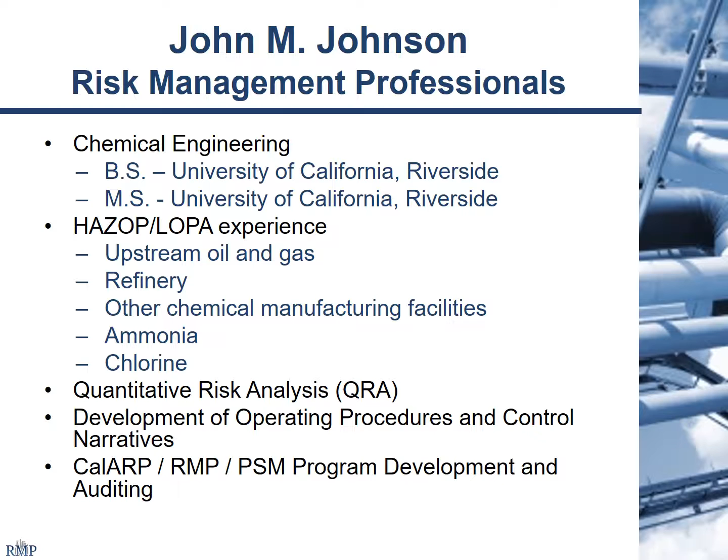I also jump into quantitative risk analysis, QRA, as Chennai mentioned. That's just a deeper dive into these quantitative analysis, as well as development of operating procedures and control narratives. I actually like being in the field. I get a little bored in my office, so any excuse to actually get me out with real equipment kind of makes me happy, and it gets me away from everyone else in my office.

All right, so the key topics. I tend to talk fast, so give me 1 second while I take a deep breath and pace myself. So this presentation is basically going to be an overview of LOPA. I'm not going to dive too deep into it, but as I'm presenting these definitions for people who are a little unfamiliar with it, I'm going to introduce certain topics, and as we go, I'm going to build a very high-level LOPA scenario. So hopefully as we do this, everyone has a greater understanding of what occurs in these studies.

Also, why do I care? The second part of the title here. Well, basically for a lot of facilities, there's changes to the regulatory framework. It's being implemented in places that it wasn't necessarily demanded before. Fortunately, there have been a lot of facilities, a lot of upstream oil and gas that I work with, a lot of other facilities who've already been introducing this over the years. Once again, this is going to roll out.

And the other reason why I care, and I will present that as we go, it really is, for me, it is complex, but it's an easy fit into a HAZOP scenario. You can introduce this into frameworks already existing and use this to override what I call dominant personalities that will often show up in a HAZOP.

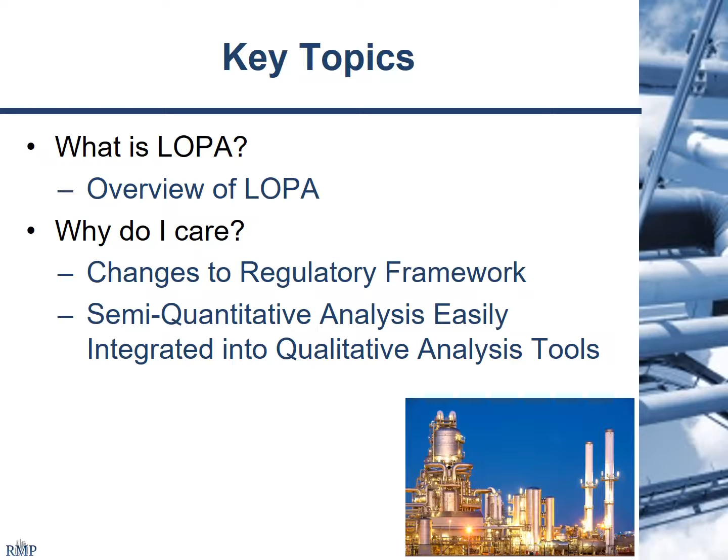All right, jumping into what is the layer of protection analysis. So this has been touched on before. It's a semi-quantitative risk assessment. Basically, just like a HAZOP, we're trying to evaluate the safety integrity of our process operations. We say semi-quantitative, quantitative. It's an order of magnitude approximation. As Chennai mentioned, the math is a little bit easier. It's something you can do in a room with a team and generate fairly quickly.

Software does it, PHA Pro does it for you. A lot of times I'll have a spreadsheet ready, but honestly with a calculator and pen and paper, we can usually do this if necessary. Typically, I've seen these used in all sorts of places. I generally get to do these right after a qualitative study, so like a HAZOP. Generally, the corporate policy is going to dictate when you would pull off these LOPAs.

So, for instance, I've been to facilities where they like to do it scenario by scenario. So you do a scenario, you develop a high severity consequence, and you can immediately do a LOPA on the HAZOP scenario developed there. Some places like to do the entire HAZOP first, then you go through, figure out what needs to go into LOPA, and then you do the LOPA. And still other facilities will say, we're going to actually disband this team, generate a whole new team, and we're going to LOPA after the fact.

Similar to a HAZOP, it relies on a multidisciplinary team. Chennai made a very good point. You are relying on math at this point, and if you've already done a HAZOP, you've already established your severities. So you actually could feasibly cut down your team membership slightly as long as you have that membership representation from the facility.

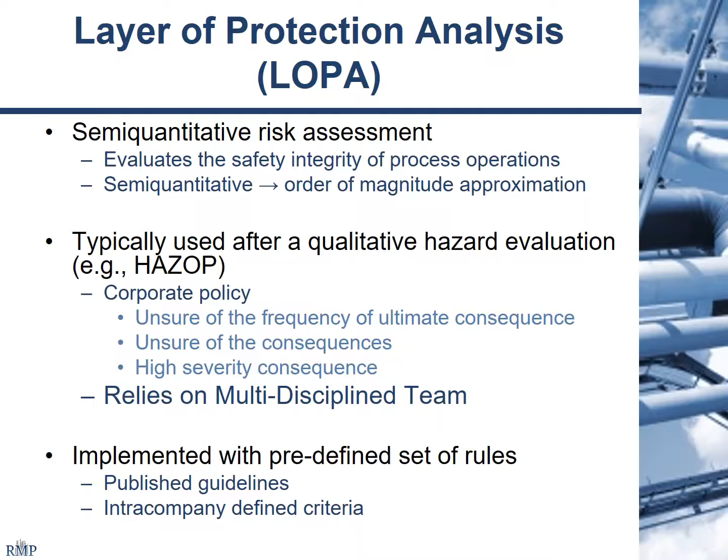So, kind of the governing idea behind this is the risk acceptance criteria from a facility. So basically, this is what they will tolerate. Typically, it's a tableized value.

For instance, here, if you look at those impact event consequences with names like catastrophic, severe, moderate, if you're in a HAZOP, maybe catastrophic is multiple fatalities. Maybe it's a single fatality. Once again, it's going to be company specific. Maybe severe is a single fatality. The important point here is what the company demands. We cannot have a catastrophic event happen more than once in 10,000 years.

So, as I said, I'm going to generate a very high-level scenario here. So, I'm assuming we had a HAZOP. The HAZOP team ranked the consequence as severe. Since the corporate policy is to perform a LOPA on any severity consequence greater than or equal to 2, we're going to start a LOPA here with a risk acceptance criteria of 1 times 10 to the negative 3, which basically means no more than once in 1,000 years.

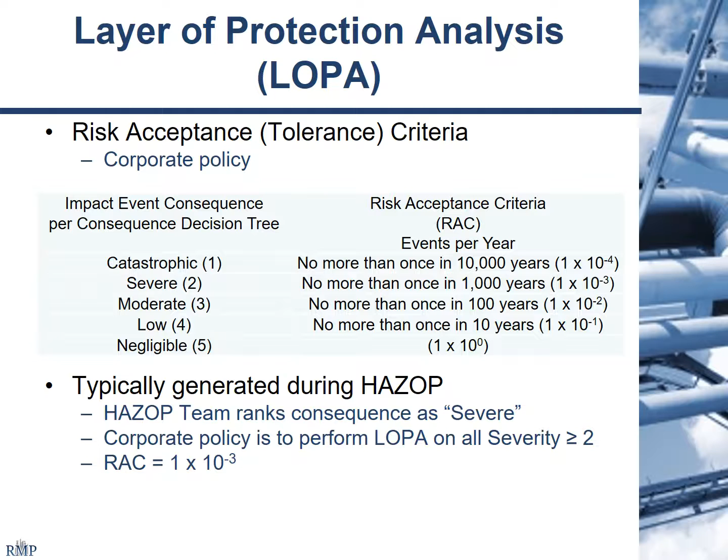The initiating event frequency. The difference between a HAZOP and LOPA: in a HAZOP, we look at that ultimate potential consequence. Something overpressures, someone gets hurt, there's personnel exposure and injury. It's kind of how we always end those statements. The LOPA looks a little bit more at initiating cause likelihood. The likelihood that someone misaligns a valve, the likelihood that your basic process control system fails. Whatever those events are that are going to ultimately precipitate that ultimate potential consequence.

Typically, the company is going to generate these based off a literature review. I stole this from the CCPS guidelines for layer of protection analysis. Unloading and loading hose failure. So if you read the literature, it says 1 to 10 to the negative 2 times per year. So the company looks at that and they said, all right, we're going to look at this once per 10 years. That's the initiating cause likelihood that, since we're following their rules and we're doing the LOPA, we are going to plug in as our initiating event frequency.

This is an example of a table, once again, from CCPS guidelines for initiating events. Typical ones I see all the time, human error for non-routine task. Frequency is about 1 in 10 years. Same thing as a BPCS control loop failure, expected to happen about once every 10 years.

Oh, really? So I mean, it happens. And that's the whole point of...

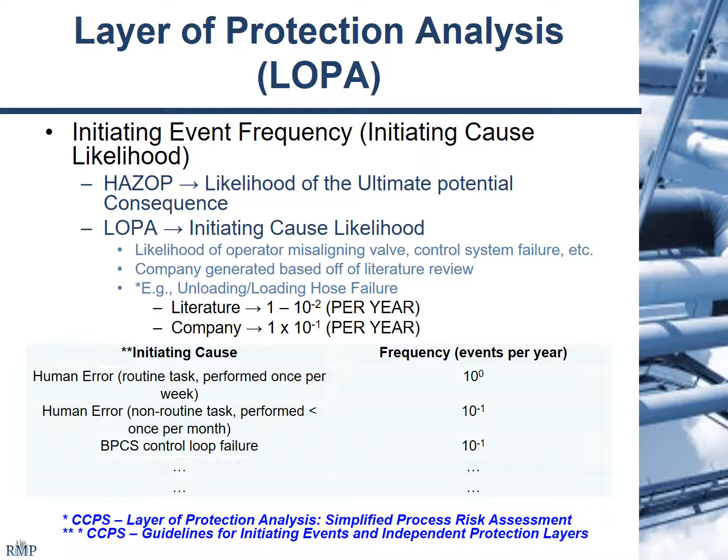I just have an assumption concerning an operation that's done so many times by one person, or how many people? Is there a population variable there? There is not, and that kind of is the difference between this analysis and a qualitative one. So we do a HAZOP, and we're going to consider those things. We're going to say, well, tell me about your field. Tell me, have you ever seen it? How many people do you have touching it out there?

This is a little less forgiving, which is why a lot of people don't like to do the LOPA. LOPA is not hard to implement, but it's less forgiving, and we haven't even got to where I start talking about the documentation, the things you need to do to prove why you make these decisions. Like Steve said, it's erring on the side of safety. Right. Well, you already told Mike.

I think sometimes some companies use more conditional modifiers to give them the extra thing that they couldn't have. That's the soft side of things, right? When they say no one's there, and so I'm going to give myself another factor. All right. We'll talk about that too. Well, and that's the whole point. I think what we're trying to do with LOPA is get rid of some of the qualitative aspects of it. There's pluses and minuses both. I actually am a fan of LOPA, but it's got to be used properly.

All right, as I said earlier, the math portion. So the LOPA ratio is basically you want to prove that with whatever safeguards we have in play, whatever the initiating cause likelihood, using those all as multipliers for probability, we will defeat the risk acceptance criteria of the company. So basically, if you divide the two numbers together, you should get a 1 or a number greater than 1. That just proves that your incident should happen less than what the company has stated it can feasibly happen.

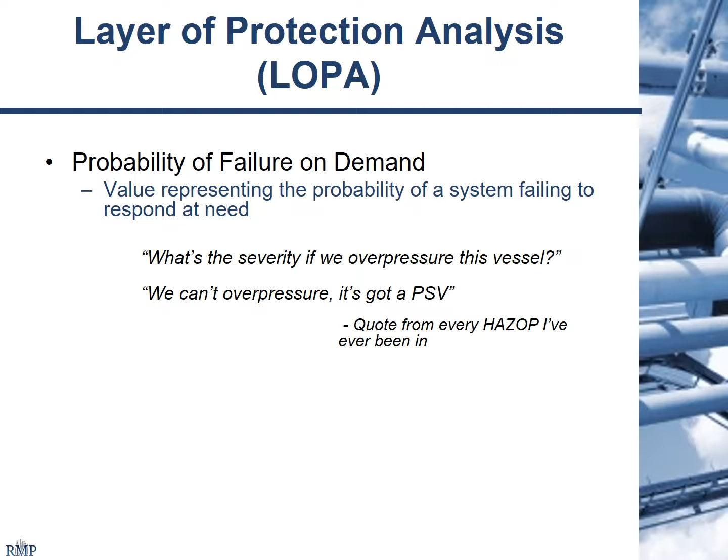Once again, I'm going to go ahead and double up on Chonai's presentation. I underlined independent because it's an independent protection layer. It needs to be independent of the initiating event. If you have a control system that failed and it opened a valve, but you have a switch that's on that same control loop, that switch isn't going to help you because the control system thinks everything's great. That's why it opened the valve.

So the first thing you're going to ask, and you're going to look in that P&ID, you're going to go, hey, and they're going to say that we've got a pressure switch high on it. It's going to shut everything down. Well, it's on that same control loop. It's happy. It's not going to do anything.

So it should also be independent of other IPLs. These are other safeguards. Once again, it's that layer of independency. So your first level could be that basic process control system. If it fails, you have an alarm. Can the operator react? Maybe they can do that. Maybe the operator fails to do that. Well, then you've got a pressure relief or some other system in play. Each one is that independent protection layer that's going to stop this ultimate consequence, this overpressure event, from actually happening.

What I like about LOPA, there's rules. This is a very simple overview. Generally, if I'm doing a LOPA, I'll actually have access to the books, and we can just pop out an entire sheet. And if they go, okay, well, we've got an alarm, I have certain questions I'm going to ask. Can an operator be expected to respond in time? Are switches maintained, calibrated, and inspected at regular intervals? A pressure relief, is it sized for the appropriate case?

Like I said, these are baseline questions. There's more that actually get involved in an actual study. These independent protection layers, they can be passive, active. Once again, there's rules governing what we can use.

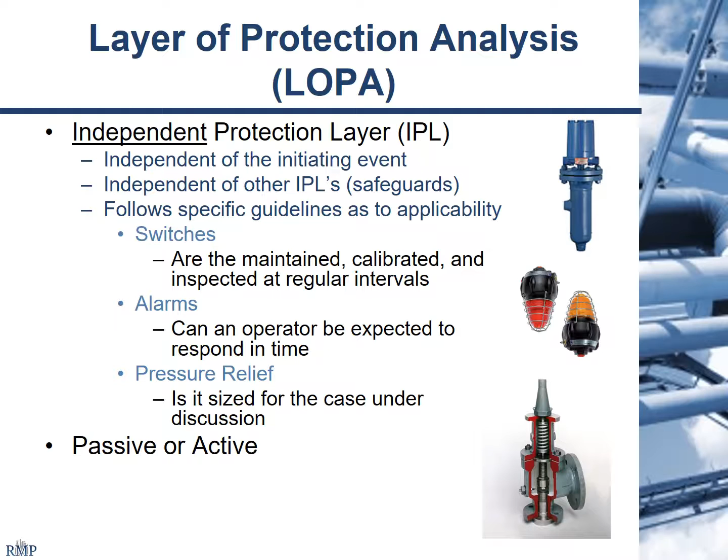As a sidebar, it's not going to enter in the equation I'm doing now, but enabling conditions. These LOPA event frequencies are on a per year basis. So everything's based on once per 1 year, once per 10 years. However, if you have some sort of seasonal risk, so if you're an ammonia facility, you're an ag plant, and you only worry about ammonia refrigeration during the summer, you want to take that into consideration, because we're going, well, it's once per year, and you're like, well, I use it 25% of the year. That simply factors into the equation, and it gives a more honest picture, and that's what LOPA is supposed to do, provide a more honest picture of what's happening in the field.

The important point between enabling condition and a conditional modifier: the enabling condition modifies against that initiating event ever occurring. Once again, seasonal risks, process state risks. If the process is not always using that hazardous chemical, well, you're not really going to calculate what's going on in those off times. Conditional modifiers, as we have brought up, the favorite one to ever bring up is personnel presence some percentage of the time. This is, to my mind, an overutilized modifier. It's a true modifier. You just have to calculate it honestly.

So if I'm in a PHA and they go, oh, well, we have one operator who goes out there once a day and he checks for 5 minutes. I'm like, cool, that's less than some percentage of the time. But of course, they also have maintenance personnel. They've got housekeeping personnel. And oh, the unit's on the way to the lunch area. So they've got traffic all day. So those are the questions you ask during a LOPA. It's all about proving and making sure that you can support those numbers if anyone ever asks you, why did you develop this particular percentage?

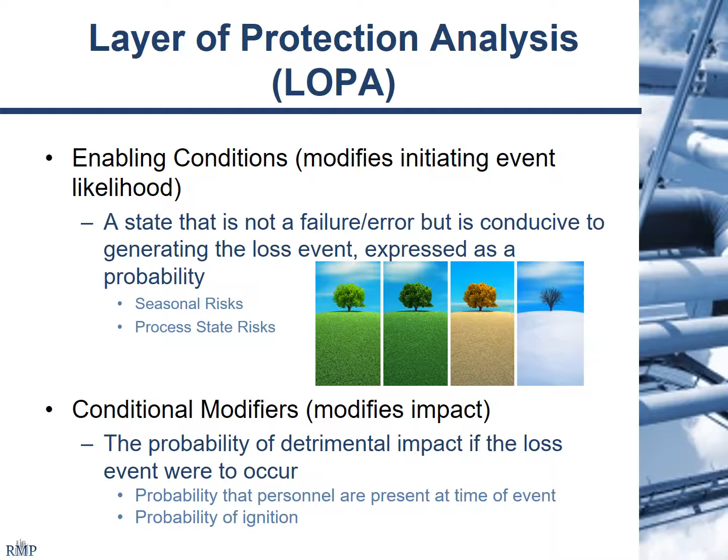Okay, so once again, here's where I go back to what I was hitting before. Layer of protection analysis, the values are documented and defensible. So these are just examples that I've seen and that I ask for if someone tells me, we're going to use this sort of probability, we're going to use this event condition. For dispersion modeling, that usually goes to probability of developing a hazardous atmosphere. I've had those come up.

Typically, if you're doing a design stage HAZOP, maybe during the FEED stage, the question was raised, so someone did the dispersion modeling, they bring it in, you go, oh, okay, we're not actually going to develop that hazardous atmosphere, but we've got a paper trail that says it. Someone did the work to study it. Maintenance records, that goes to demonstrating the reliability of your IPLs. It shows that they're being maintained, it shows that they're being inspected, and they're being calibrated. Once again, all those rules that LOPA requires you to do.

Policies and procedures, once again, this goes back to the personnel presence. If you've got signs up and you've got a policy and procedure that says, they've got a lunch area on this other side of this, but they're required by our policies and procedures to walk all the way around the plant. They've got something that says this is only authorized personnel. They just have to demonstrate this is why we're saying that no one's going to be out there except for some percentage of the day.

Electrical classification, I threw this in as an example. Once again, it goes to probability of ignition. Probability of ignition is a little harder to calculate. Typically, it takes time, so you really won't see it pop up in the study unless someone's done the work and can prove it in the study.

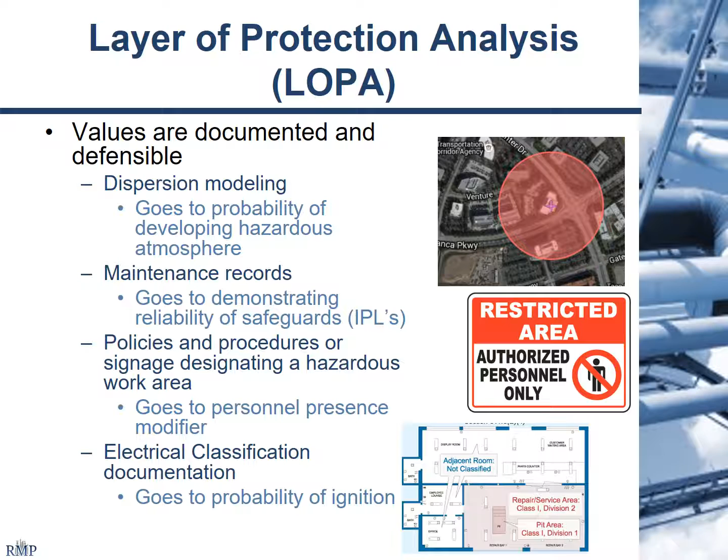Back to our example. I brought up the probability of failure on demand. These, once again, representative table, a very easy one. This is a probability of failure on demand based on industry best practices. Basic process control system will generally fail about once every 10 years. A human being will fail to respond about once every 10 years. Spring-operated valves are considered a little more robust because they're mechanical.

Probability of ignition. Are you assuming that there's an electrical source? It's simply one factor. So, once again, that's why it has to be developed, because different chemicals are going to have different reactions to hitting oxygen. And we also, right. Trucks, cell phones, all that stuff comes into play.

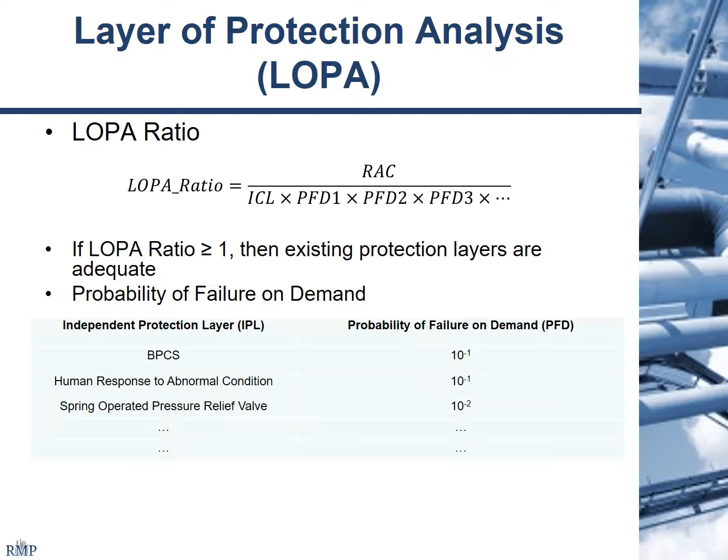Okay, so probability of failure on demand. We factor this into our, I'm building my little LOPA scenario here. I had my conversation with my team. I looked at it. It was a pressure. We don't believe the operators can respond to the alarm quick enough. The shutdowns are on the same control loop. So basically I asked them, well, what do we have? We talked about the pressure relief device. It's got that 10 to the -2.

I asked the questions, is it sized for this event? Is it calibrated and tested on the appropriate frequencies? And once again, typically what I'd ask for, and they don't necessarily have to show me the document, but what I'm going to say is, do you have a reference number for the work orders that says this is being done? And I'll just pop it in as part of my safeguard. It's just a parenthesis at the end.

Now, this little note here, I see this a lot in design, so typically I'll always add a recommendation. So if we are going to credit this, I'm just going to make a recommendation to ensure this device is added to a critical instrument list, and then I'll define the critical instrument list as requiring those certain maintenance activities, which means we can rely on this piece of equipment.

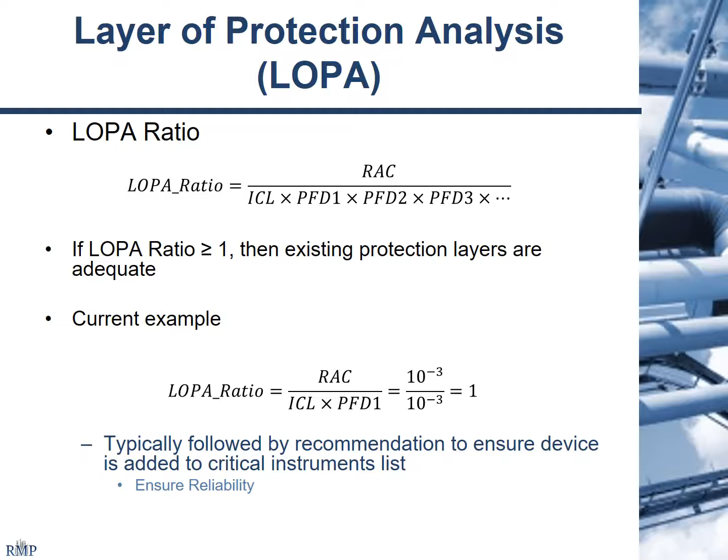Okay, that was the very quick introduction to how I would apply LOPA. All I was trying to point out, it is fairly easy to implement, but as we saw from the questions that came up, it's unforgiving. There's rules. You can go, what about this? Well, LOPA says no. Or what about this? LOPA says yes. We can move forward with it.

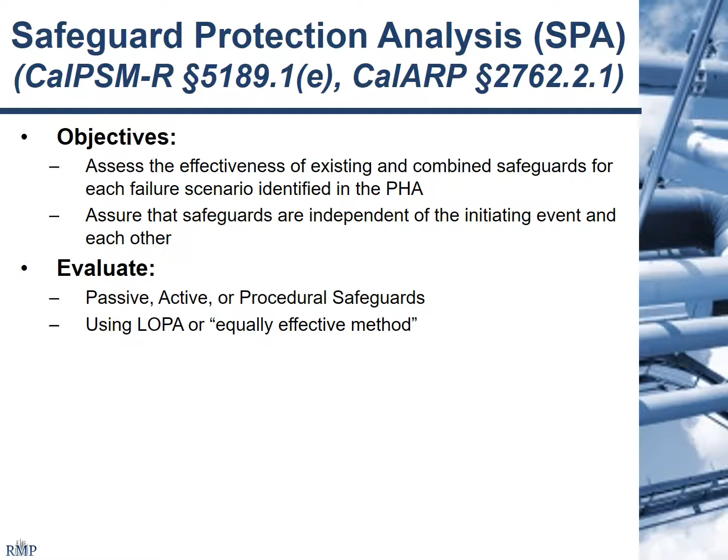So why do I care? As we said earlier, I stole this from Steve's presentation. There are changes coming. This is associated with the SPA as part of the new Program 4. If you look at the definitions here, assess the effectiveness of existing and combined safeguards for each failure scenario identified in the PHA. Evaluate passive or active or procedural safeguards. LOPA pretty much meets these criteria, which is why it's been explicitly called out in many of the places you see in these regulations changing.

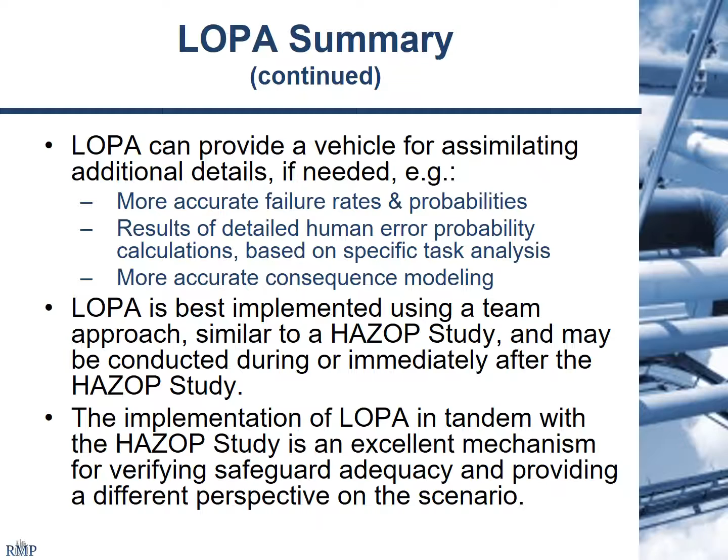Now, is it LOPA in 20 minutes? All right. Are there any other questions?